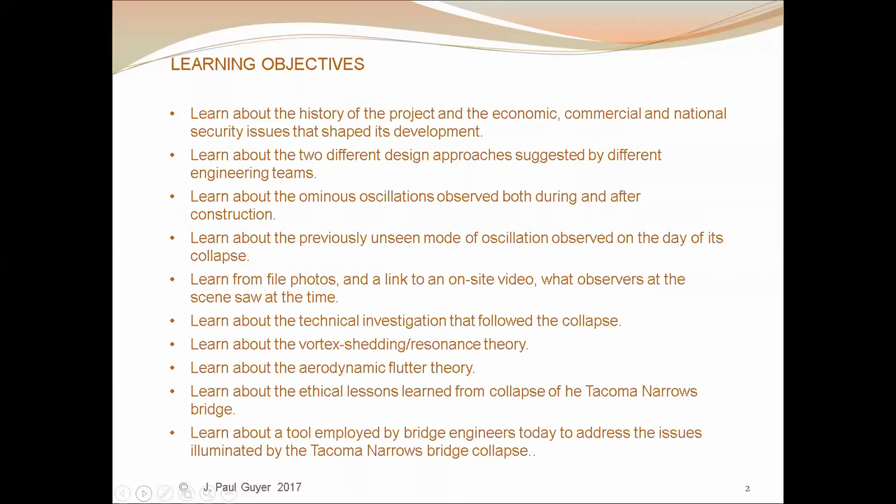Learning objectives, all very interesting. Here's kind of what I'll be talking about, the way I'll be slicing up the information today, the discussion today.

I'll talk about the history of the project, how it came into being, and that's important because what happened historically really caused the ethical failure that we'll be focusing on today.

These ethical issues webinars, by the way, there's certainly room for differences of opinion, and there can be those who would have a different opinion of this incident than mine. What you'll obviously be hearing about today is my view of what happened and what the ethical issues were.

But if others have a different view, that's fine. I'll be talking a bit about the history of the project. The design proposals for the bridge—there were different ones proposed, and then there is the actual design that was implemented.

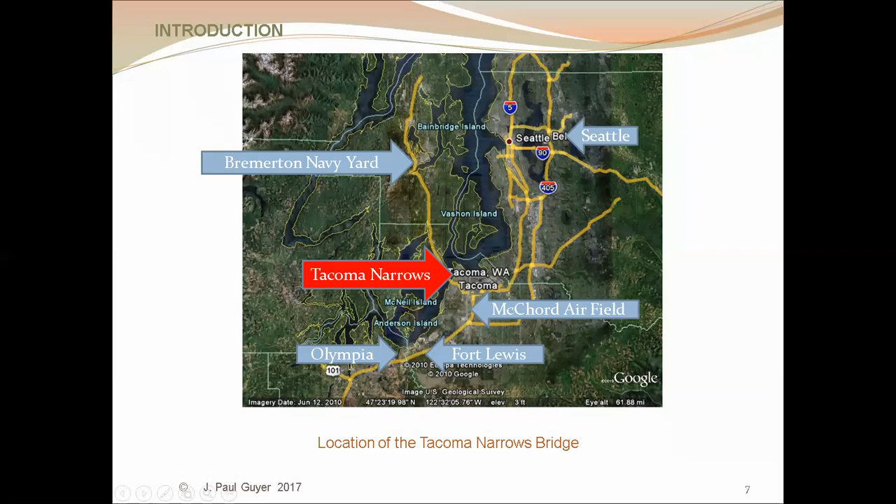So this is what we're talking about, and the bridge we were talking about is there at Tacoma. The Tacoma Narrows is the body of water that the bridge was crossing.

Just to give you a feel for driving distances up in this area back at that point in time, late 1930s, early 1940s: from the city of Tacoma to a place called Gig Harbor, somewhere on the Olympic Peninsula, before a bridge was built at the Tacoma Narrows, that was a 107-mile drive. If you could get a bridge built across the Tacoma Narrows, it would only be 8 miles, and driving time would be reduced from 2 hours and 10 minutes to 17 minutes.

Now, in civilian terms, you might say, well, a couple hours, that's no big deal. You can get stuck in a traffic jam in LA for 2 hours. So from a civilian perspective, some of these time differences don't sound that important, but from a defense standpoint, they are. They're very important.

And this was very much illustrated as an example as a result of the Japanese attack on Pearl Harbor and how quickly it took place, and that the U.S. did not have time to mount any sort of defense at Pearl Harbor, and great harm was done to the Pacific Fleet as a result. It happened that a number of the major capital ships of the U.S. Navy were at sea when the Japanese attacked, so they avoided damage. But we all know about the damage and the harm that was done at Pearl Harbor.

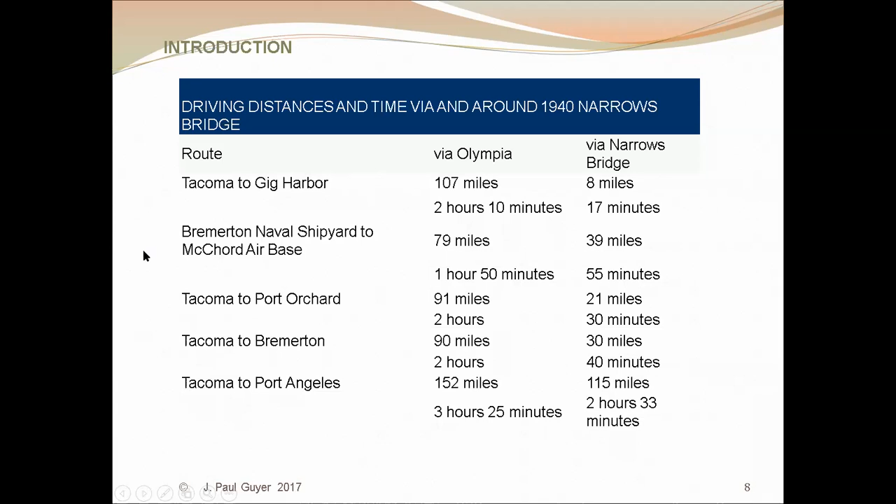And again, that doesn't sound like a lot in civilian terms, but from a military perspective, it was very important. Some other distances: Tacoma to a place called Port Orchard on the Olympic Peninsula, 91 miles, reduced to 21 miles if you could get a bridge at the Tacoma Narrows. Tacoma to Bremerton, very important, 90 miles, could be reduced to 30 miles, driving time reduced from 2 hours to 40 minutes. So important savings in driving time and the ability to move military from Fort Lewis and aircraft from the air base McChord to the defense of Bremerton.

Here is an aerial photo today, and the body of water is, of course, the Tacoma Narrows. That's the city of Tacoma on the right, and the bridge that you see across the Tacoma Narrows is the bridge that is there today.

On the left-hand side there, I haven't had a chance to verify this, but let's see now. I've got a phone call here, and I need to get rid of that. Okay.

That thing you see on the left there, to my eye, looks an awful lot like a World War II era airfield. And so again, back at that time, the 1930s, there was no bridge, so it would be a long drive winding around to get to that airstrip, if that's in fact what it is.

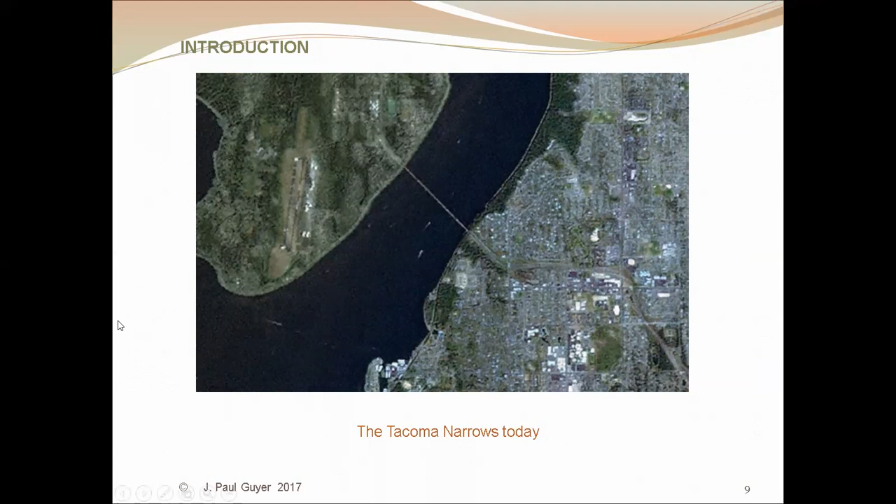So here we are in the 20th century, and no bridge across the Tacoma Narrows. Let's see, I want to check something here. I'm checking my controls. Stick with me.

So here we are in the 20th century, and actually back in the 19th century, in the 1800s, is when interest began to perk up in the Pacific Northwest about the issue of a potential bridge at the Tacoma Narrows. Back in the 1890s, early part of the 20th century, logging, a very important industry in the Pacific Northwest, with a lot of timber, very heavily forested. The sawmills, the market for timber, was south of the Tacoma Narrows in Washington State, and the logging industry.

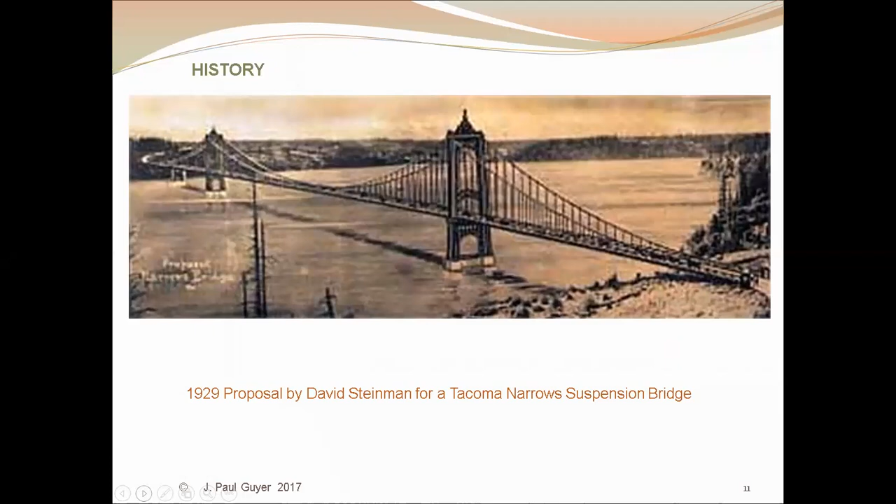Here was one of them - it was for a suspension bridge. Again, just in the talking stages. Since it would be a high-level suspension bridge, it would not obstruct the navigable waterway.

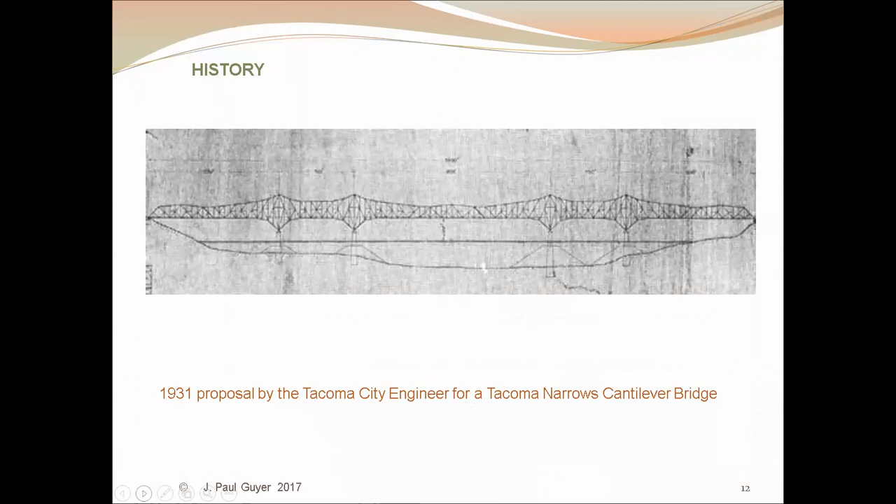Here is a cantilever bridge that was sketched up by the Tacoma city engineer, high enough to satisfy the navigable needs.

But there's still the issue of funding - who's going to pay for it? The city of Tacoma certainly wasn't going to pay for it. The business and commercial interests in the Tacoma-Olympia area didn't have the money to pay for it. The state of Washington didn't have the money to pay for it either.

One idea that began to perk up was for a toll bridge - in other words, float bonds and then pay them off with tolls paid by automobiles and trucks that use the bridge. The problem there was that the traffic projected to be crossing the bridge at the Tacoma Narrows was quite small, and a toll bridge just wasn't going to generate enough revenue to pay for the bridge.

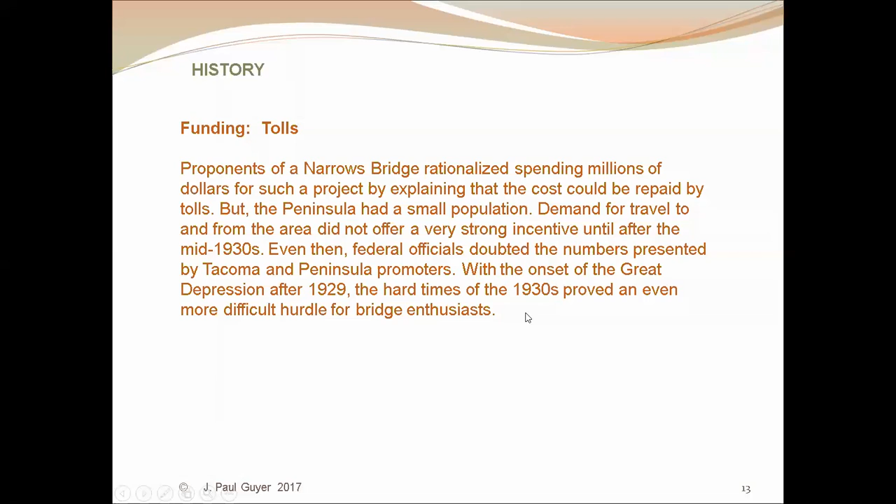So there was a desire for a bridge, but no money. In addition, since they couldn't see a way to get a bridge built across the Tacoma Narrows, the state of Washington said, well, let's at least start a ferry service across the Tacoma Narrows.

So the state of Washington let out a contract, a concession for a ferry operator, so at least people could drive down to the water, get on a ferry, and take it across to the Olympic Peninsula. But that had limited capacity, and it was a very slow way to get across.

The concession contract was let to a private company called the Washington Navigation Company in 1926. This concession agreement had a no-competition clause in it, which seems logical, because nobody would incur the cost of running a ferry across the Tacoma Narrows if another ferry service might be started to compete.

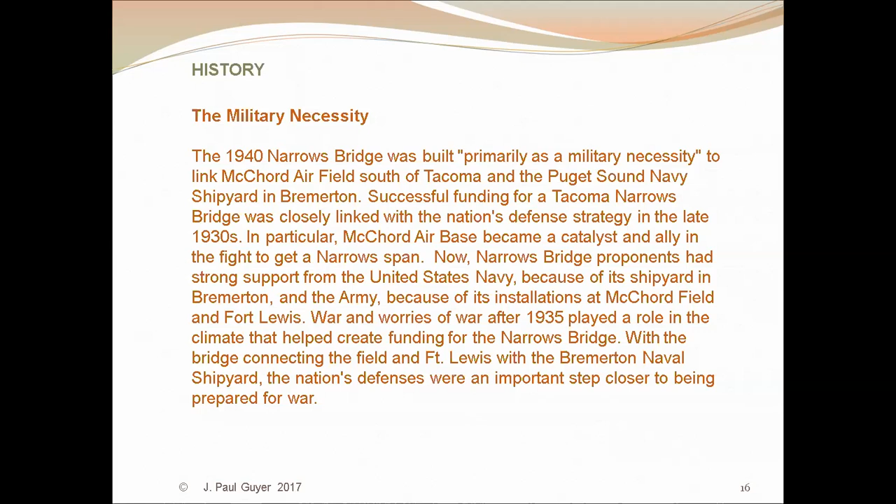And the entity being looked at to provide this funding, of course, was the federal government. So the state of Washington's Department of Highways undertook to put together a proposal to the federal government for funding for a Tacoma Narrows Bridge. This effort was under the direction of an engineer named Clark Eldridge.

He and his engineering staff employed at the Washington Department of Highways prepared plans for a suspension bridge that was of conventional design. Now, the key feature of the bridge that is important here is the roadway support girders.

The conventional design practice back at that time, and even continuing today, is to have the roadway support girders be truss girders, open truss girders, and very deep truss girders, because as you'll recall, when you make the cross section of a girder or a beam deeper, it's stronger. So a 25-foot deep truss girder reflected the state of the art in bridge design for suspension bridges at that point in time.

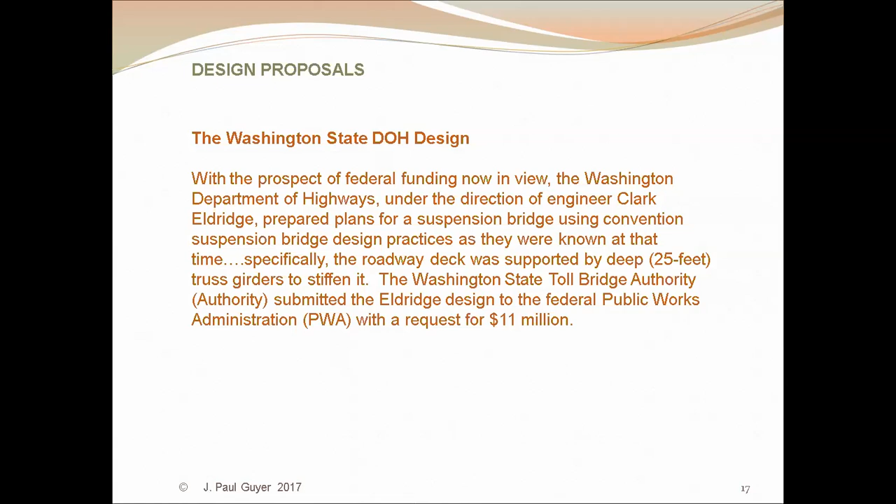A point of interest, not relevant at all to what we're talking about here today, but back at that point in time, the director of the Washington State Highway Department was a gentleman named Lacey Murrow. And Lacey Murrow was the brother of the very well-known Edward R. Murrow, radio and later television newscaster for networks. Just an interesting sidelight there.

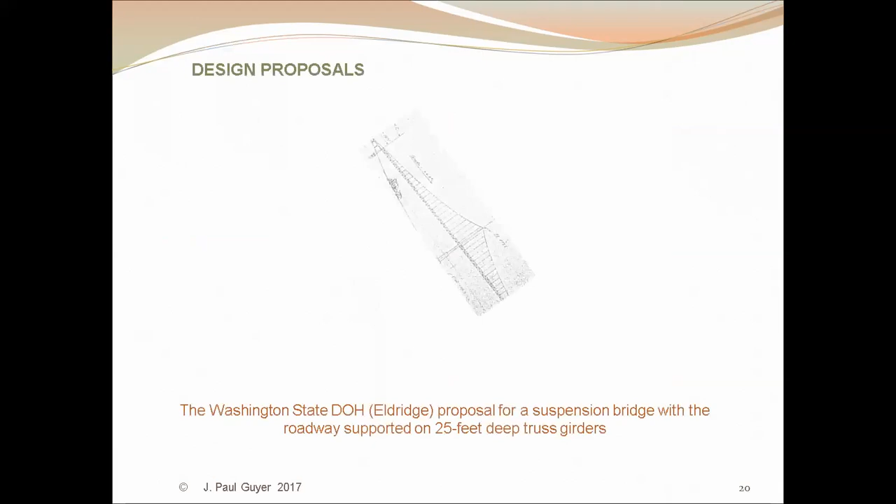So here is the design that Clark Eldridge and the Washington State Department of Highways came up with: a suspension bridge, high level, so it's not obstructing the navigable waterway. And the key feature is that it had 25-foot deep open truss girders supporting the roadway. This was then, and continues to a large degree today to be, the standard operating procedure. Well-known and significant bridges had been built with this type of roadway support girder successfully. So a conservative, conventional design.

Now, let's see, I'm checking my clock here.

As happens practically almost every time you have a large public works project or undertaking in the mill, there develops a competition between in-house government agency engineers and private engineering firms. The in-house government engineers with the Washington Department of Highways wanted to design the project. That's just the way engineers are. And private engineering firms wanted to get the contract to design the bridge, and that, of course, is an economic concern for the private engineering firms.

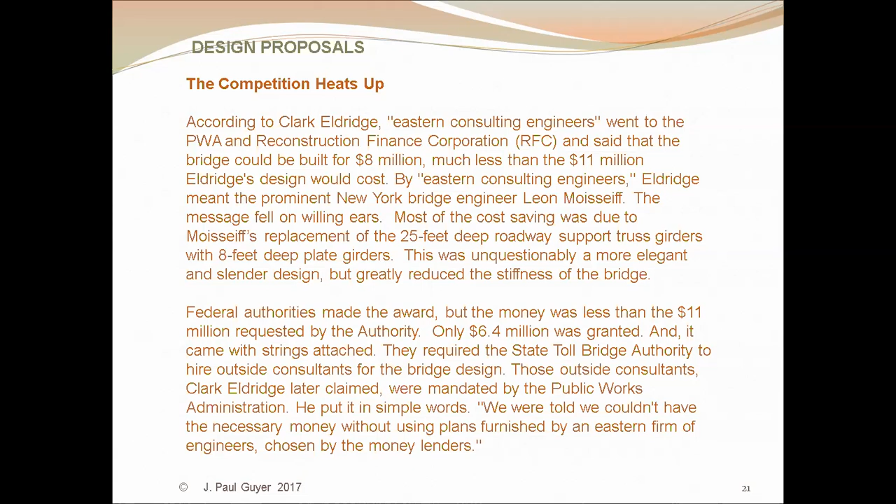The federal government said to the state of Washington, we'll give you the money for the bridge, but only if you farm out the design of the bridge to these private engineers on the East Coast. The Washington state engineers were livid. Clark Eldridge and his engineers protested. They said that Moisseiff's plan was fundamentally unsound.

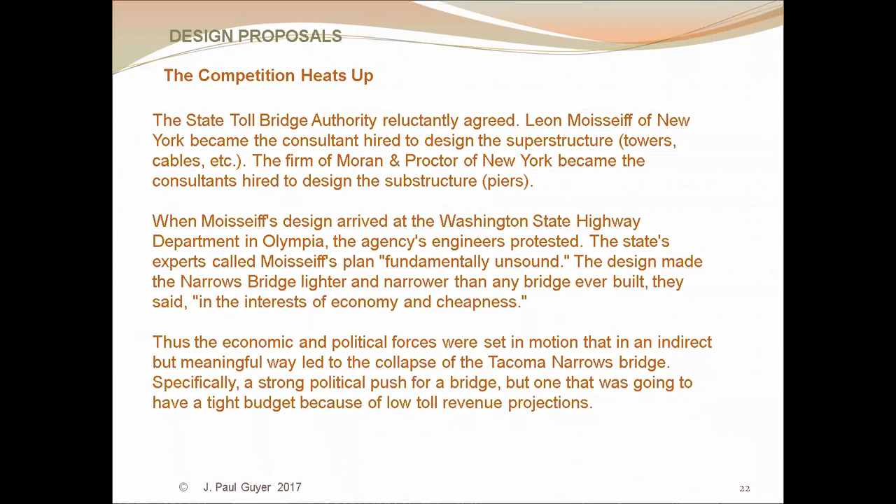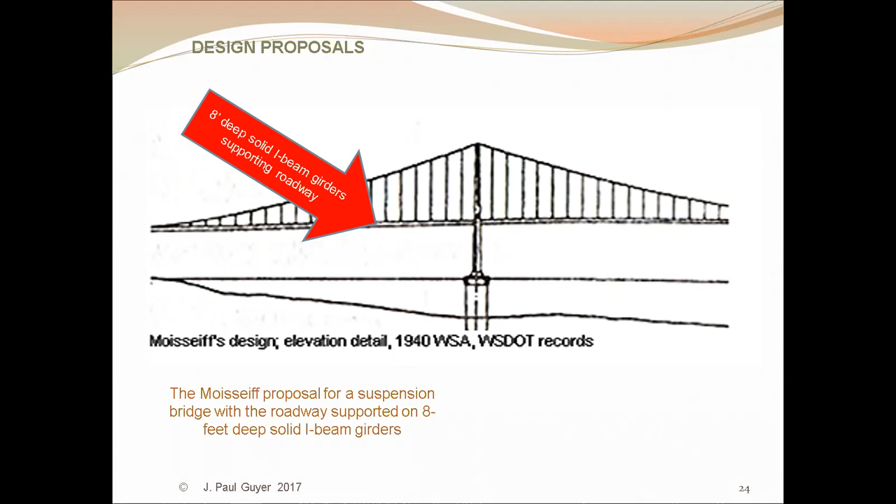Here's a picture of Mr. Moisseiff's design. You see the shallow I-beam girders, only 8 feet deep, as compared to the 25-foot deep girders in the Clark Eldridge design. The solid I-beam girders are solid, so the horizontal winds do not pass through the girders, but impact the girders.

There's a chart I'm looking for. Another factor that came into play here is the fact that the roadway was narrow. It was only a 2-lane highway across the proposed bridge because the amount of traffic was projected to be light. And when you reduce the roadway width, that makes the girders even less stable. So that was another consideration. Now here's a table that I think illustrates what we're talking about pretty well.

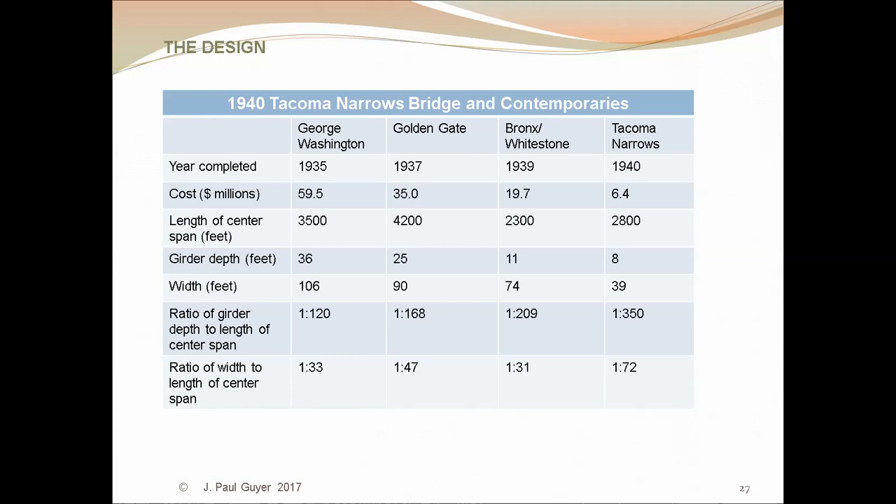And then you see the Tacoma Narrows: the girder depth was only 8 feet, less than a fourth of that at the George Washington. The girder was a solid I-beam configuration, not a truss configuration, so the wind did not blow through the Tacoma Narrows girders. The width of the roadway was only 39 feet. The ratio of the girder depth to the length of the center span at Tacoma Narrows was 1 to 350, compared to George Washington's 1 to 120, Golden Gate's 1 to 168. And the ratio of the width of the roadway to the length of the center span was 1 to 72, compared to 1 to 33 at George Washington and 1 to 31 at Bronx Whitestone.

That, though, is the design that the federal government said they would fund, and the state of Washington Department of Highways reluctantly acquiesced because that was the only way they were going to get the money for the bridge.

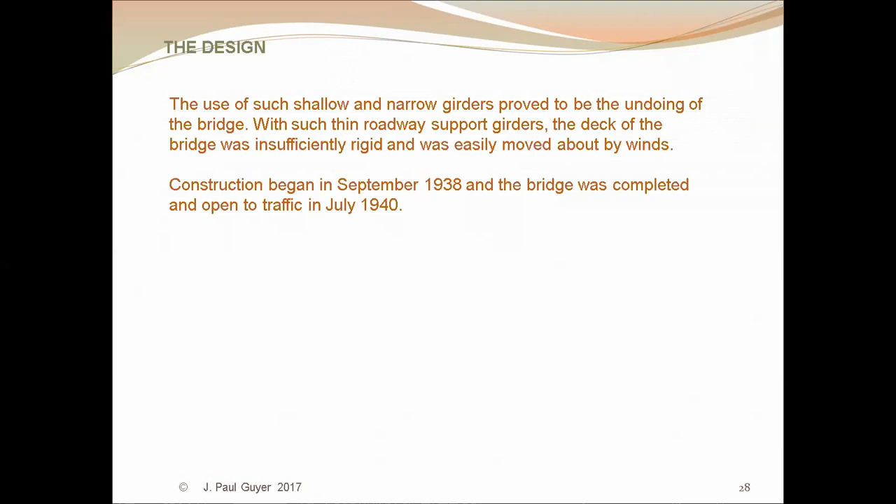Construction of the bridge began in September of 1938. The bridge was completed and open to traffic in July of 1940. Here are some pictures of the bridge under construction.

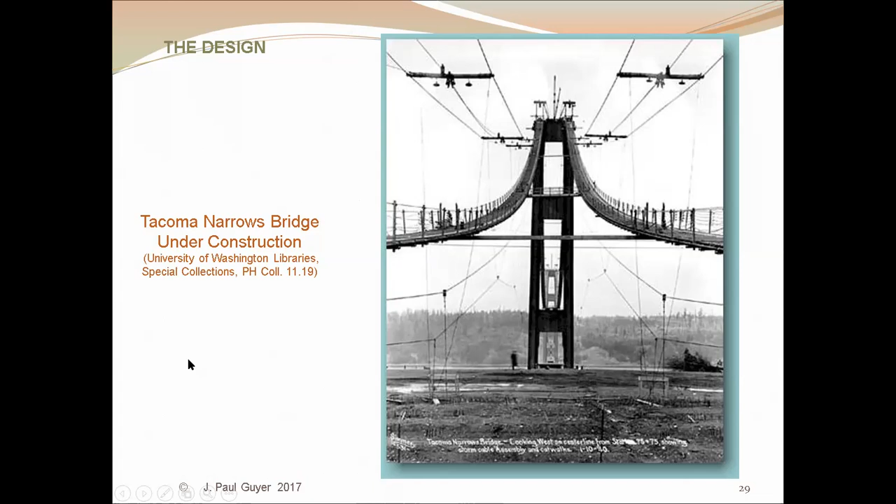The bridge begins to take shape, and you can see that it's a very elegant bridge that is being built. Here's the bridge completed. Again, very elegant, light, and very beautiful. Another picture, and you see the roadway support girders, solid I-beams.

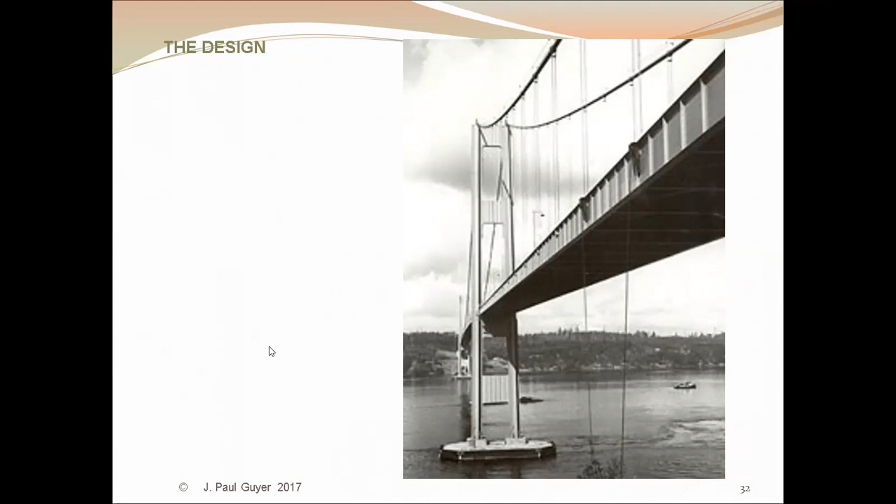As a result of being solid webs, they seriously impeded the flow of the horizontal winds through the Tacoma Narrows. Winds are a significant consideration at the Tacoma Narrows.

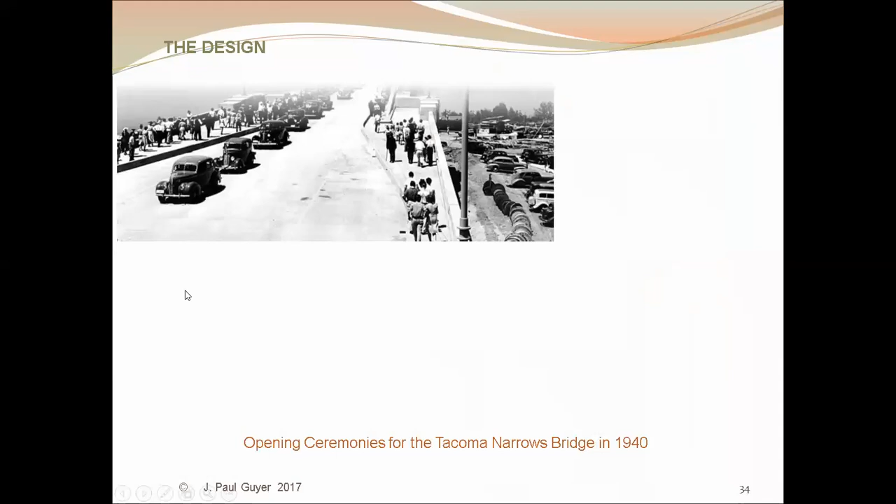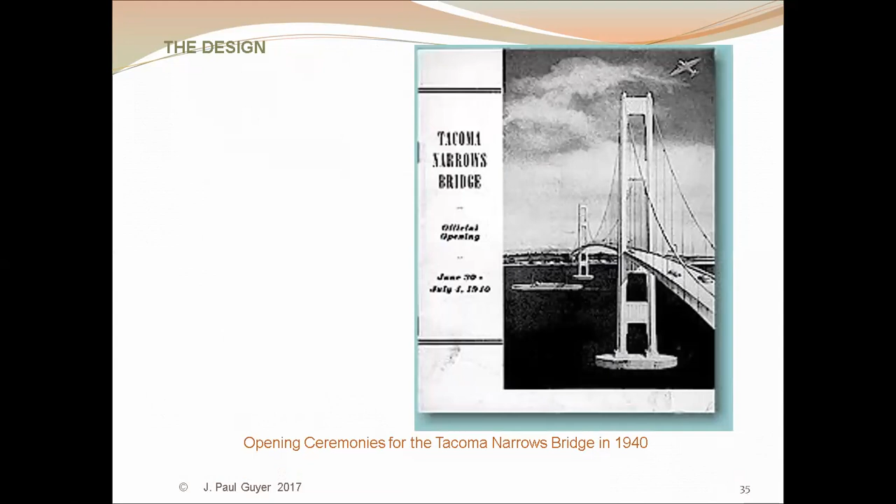Even before the bridge was completed, the people working on the bridge began to experience serious oscillations. The bridge became, even while still under construction, known as Galloping Gertie because of the up and down transverse oscillations that were being experienced during construction.

The bridge opened on July 1st of 1940. It became something of a tourist attraction. People from Seattle on a Sunday afternoon would go out for a drive in their cars and specifically drive across the Tacoma Narrows Bridge and experience the kind of wild ride that was there as a result of these oscillations. And the bridge managers, the state of Washington, had a problem with this bridge.

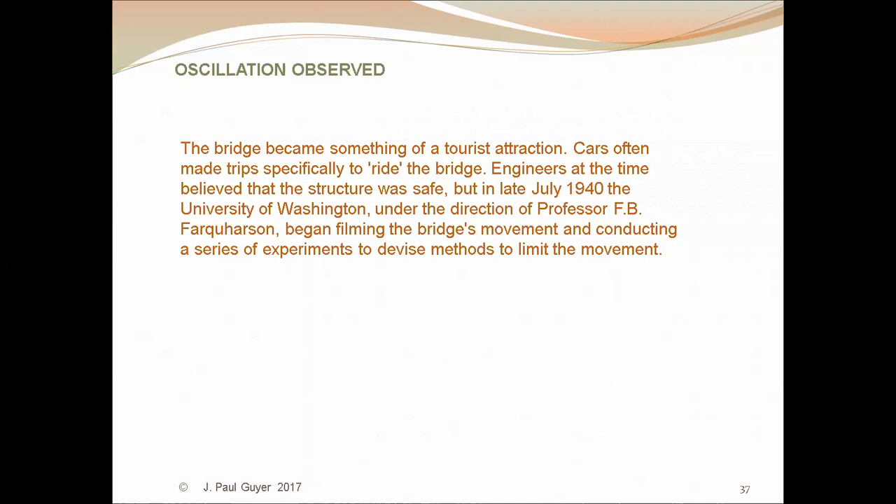They retained the services of a Professor Farquharson at the University of Washington to review the design, to investigate, and to develop mitigation measures that could control or eliminate the oscillations. Here is the state of the technology that Professor Farquharson had available to him.

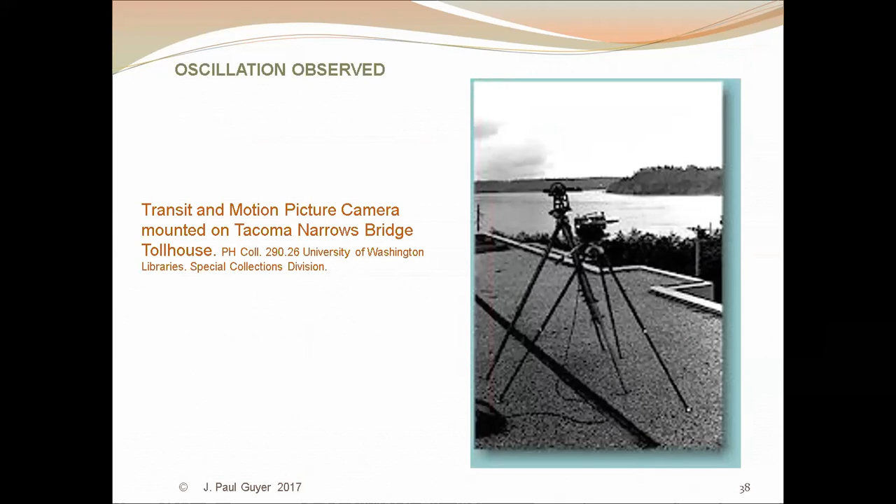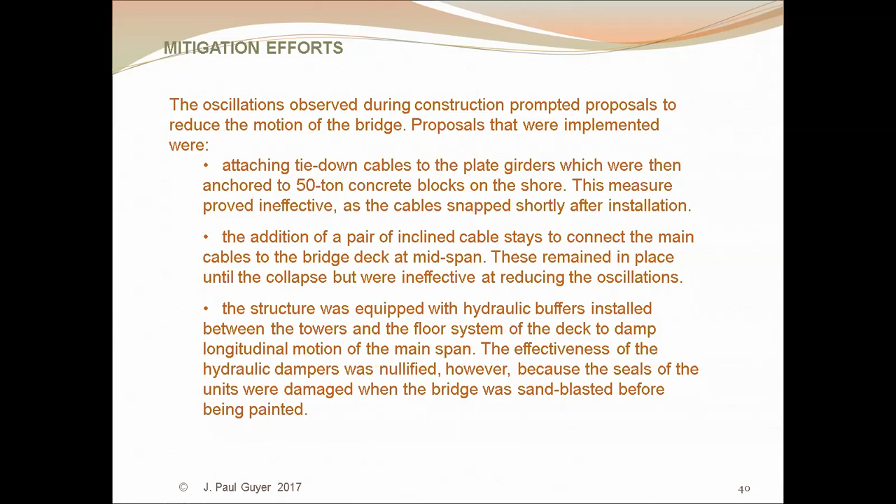Some Band-Aid type mitigation measures were attempted and did get in place before the bridge collapsed. Tie-down cables were put in place. Hydraulic buffers were installed between the towers and the floor system of the deck to damp the oscillations, but neither was effective.

One of the more bizarre proposals was to drill holes in the solid girders so that the air would pass through them and not act as aggressively on the girders. This idea needs to be cooked a little more, because obviously if you're drilling big holes in the flanges and the web, you're going to weaken the girder. So that was not a real swift idea.

Another idea that was identified was to provide some streamlining around the girders, and that had some value.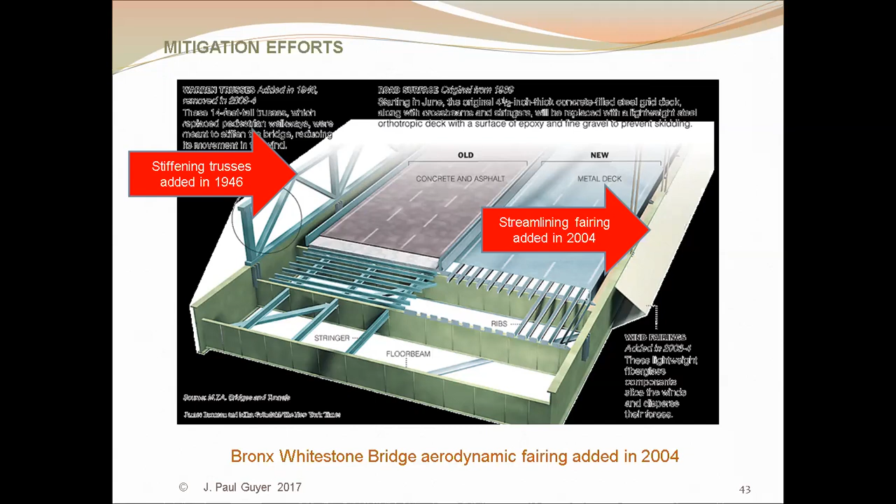This incident, the collapse, took place in 1940. You might be thinking, well, geez, why did it take them until 1946 to get any remedial measures in place? Well, the reason is that during World War II there was a great shortage on the availability of steel, and the materials were not available for this type of project. All of the country's steelmaking capacity was devoted to the war effort.

So bridge opens in July of 1940. On November 7th, the wind was blowing through the Narrows at a steady speed of about 42 miles an hour. Stiff wind, but steady. And that's important, and we'll see why.

At 10 a.m., the bridge began to oscillate severely in the torsional mode, and the bridge was closed to traffic. The bridge had been oscillating since it was under construction in the transverse mode, up and down. And on this day, it began to oscillate in the torsional mode, clockwise, counterclockwise, clockwise, counterclockwise.

Probably this was due to suspender cables finally breaking on one side, and that altered the support of the roadway asymmetrically, and the bridge began to oscillate in this torsional mode. At 10 a.m. on November 7th, the torsional oscillations are observed, the bridge is closed.

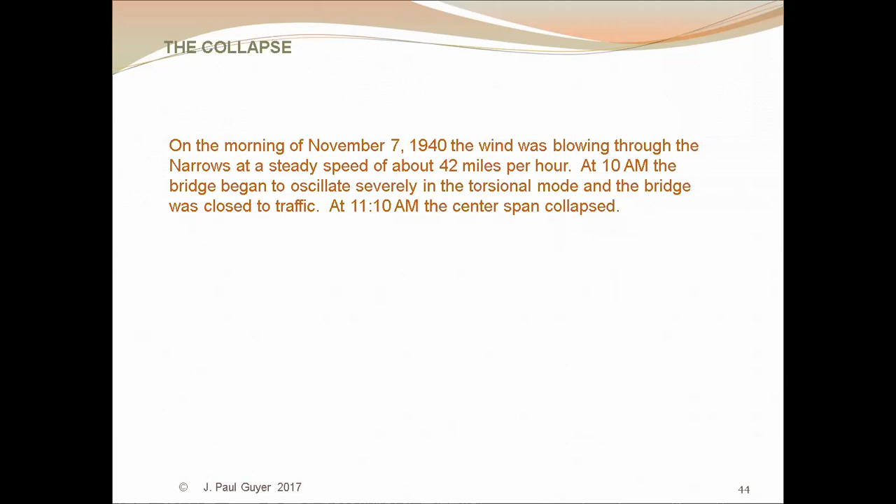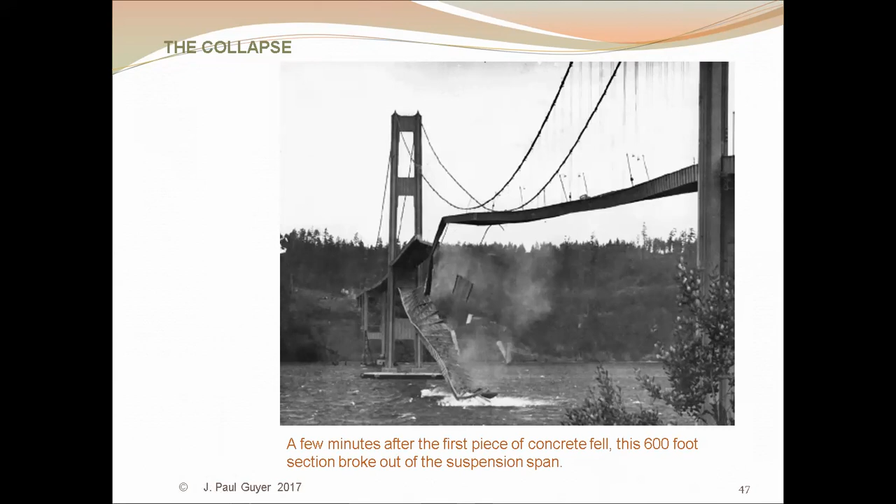And here is the actual collapse. Remember that everybody knew this bridge was going to collapse, and so there was an opportunity for people to film the collapse and to take still photos of the collapse. Here is another picture of the debris. Another picture.

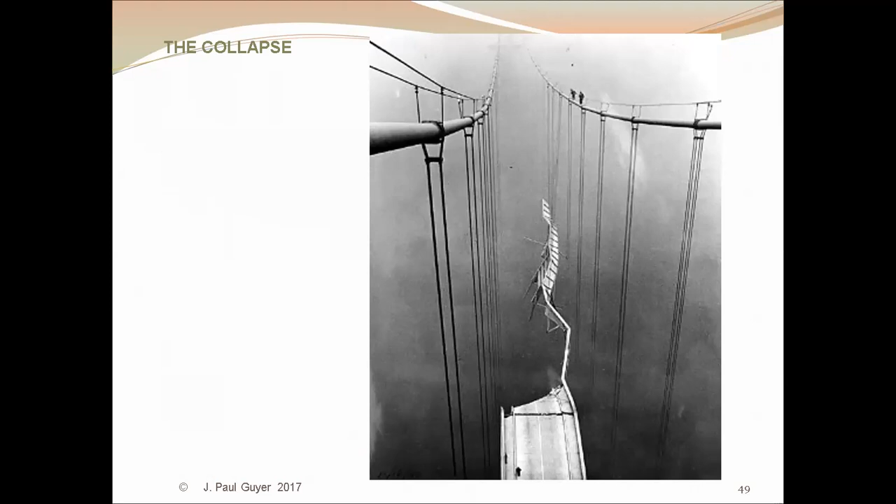Damage to the cables. And there was some twisting and buckling of the towers.

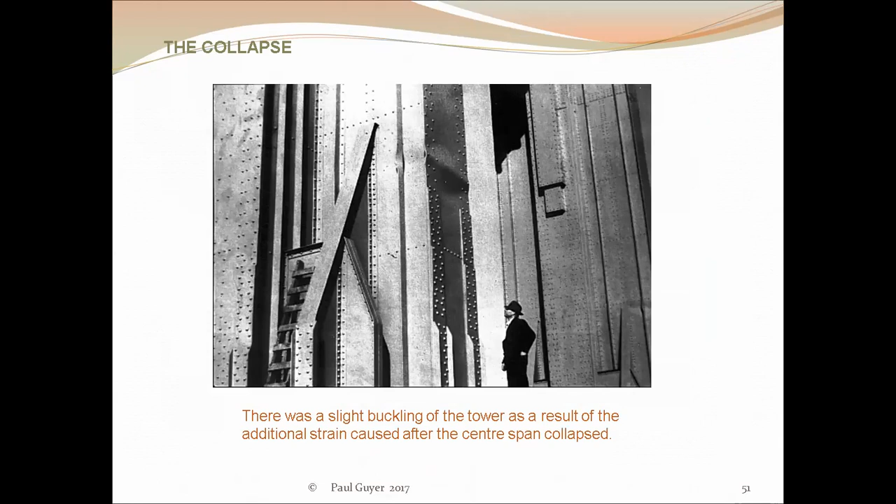Now, as I indicated, there are some videos. These were taken from 8mm movies that were filmed, and they're available on YouTube, so you can review these at your leisure. Now though, we're going to see one of them here, about a 5-minute video.

So the incident takes place, and there of course is an undertaking to investigate the collapse and try to determine what the cause of it was. It was under the direction of an entity called the Federal Works Agency.

It looked at random fluctuations in velocity and direction of the wind, perhaps as a cause, fluctuating eddy currents, the von Karman effect could have been a factor, and then resonance or self-induced vibrations caused by wind fluctuation.

Now the resonance theory really didn't pan out very well, for the simple reason that the wind speed, although high, was constant. To have resonance as a consideration, you need a vibrating or alternating forcing frequency. The wind would have to be vibrating, if you will, fast, slow. And that was not the case.

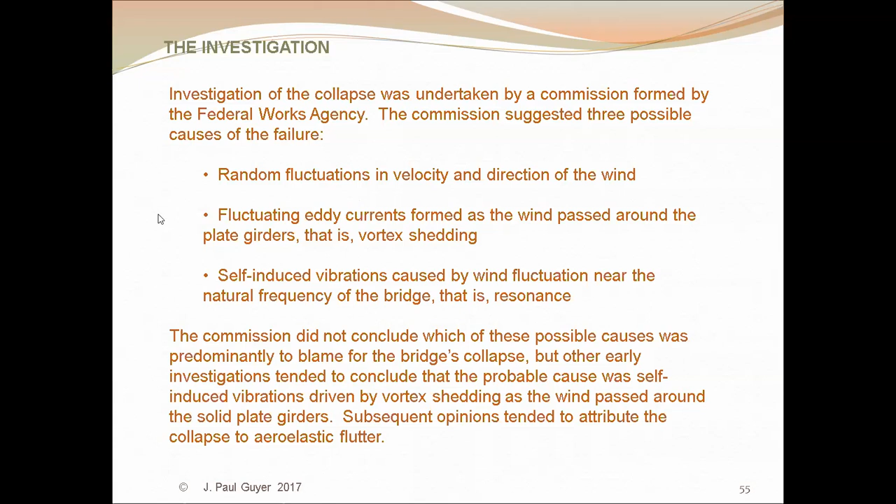So resonance was ultimately ruled out. The investigation focused on the fact that this was the first suspension bridge to use solid I-beams to support the roadway.

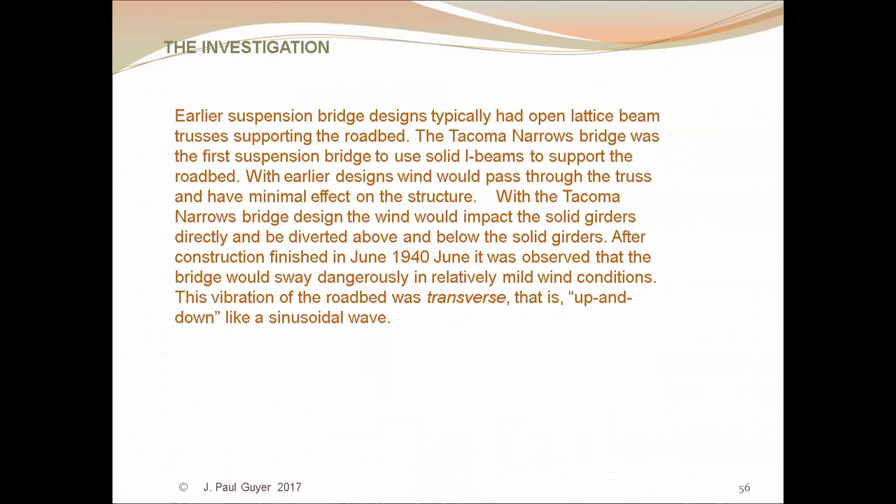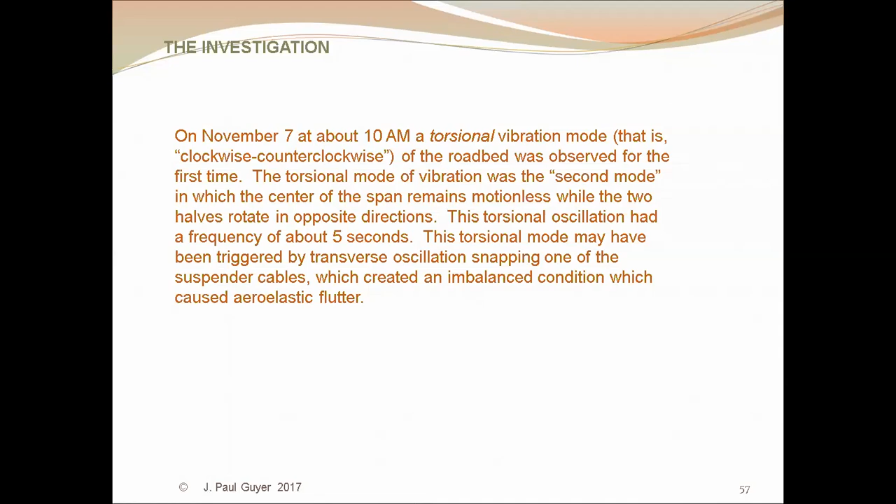And the torsional vibration mode, clockwise, counterclockwise - the speculation was, and it seems pretty reasonable, that all of the transverse vibration that had been going on for some period of time had resulted in one or more of the suspender cables breaking, which resulted in an asymmetric support for the roadway. And as a result, you got the torsional vibration mode.

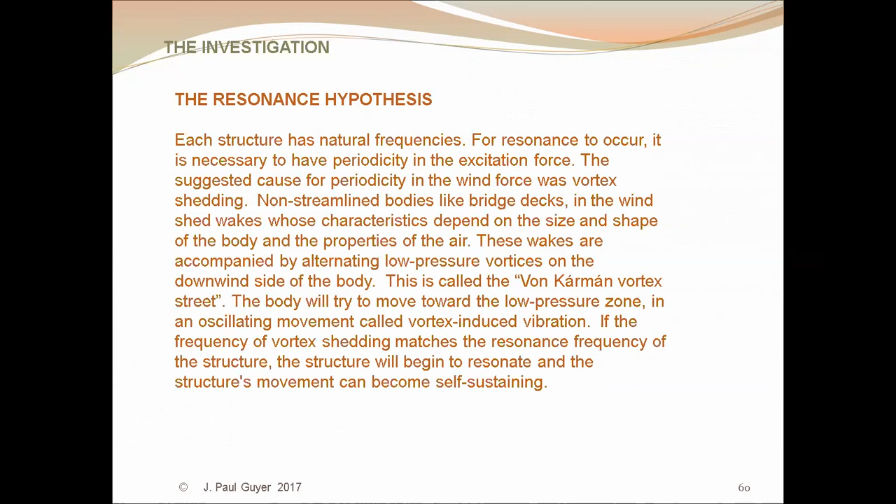The resonance hypothesis - there's a little bit of discussion on these slides about the resonance theory, and you're welcome to review it at your leisure. But like I say, it seems to be pretty well understood today that resonance was not the cause of the failure.

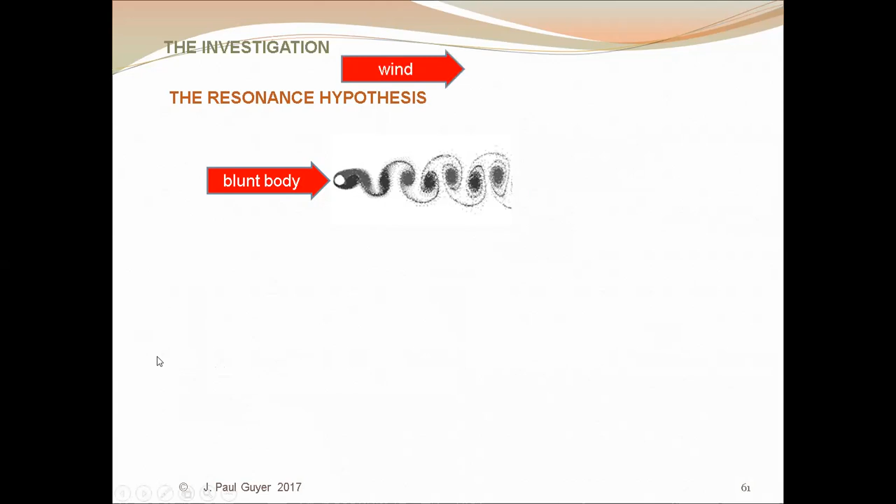The von Karman effect - Theodore von Karman, who was a very well-known aerodynamicist at Caltech, postulated and illustrated the von Karman effect.

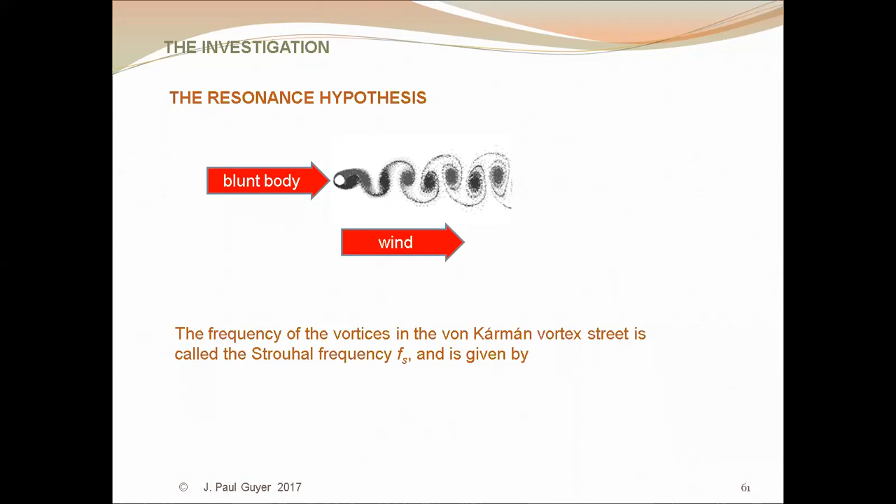In other words, when you put a blunt body in an airstream, the air tends to spin off of the backside in an alternating fashion. This was originally developed in the field of aircraft design - the airfoils in the airstream would spin off in an alternating fashion and cause vibrations. And the same thing occurs when you put a blunt body like a bridge girder in an airstream.

So flutter, aeroelastic flutter, probably was an important phenomena in what happened.

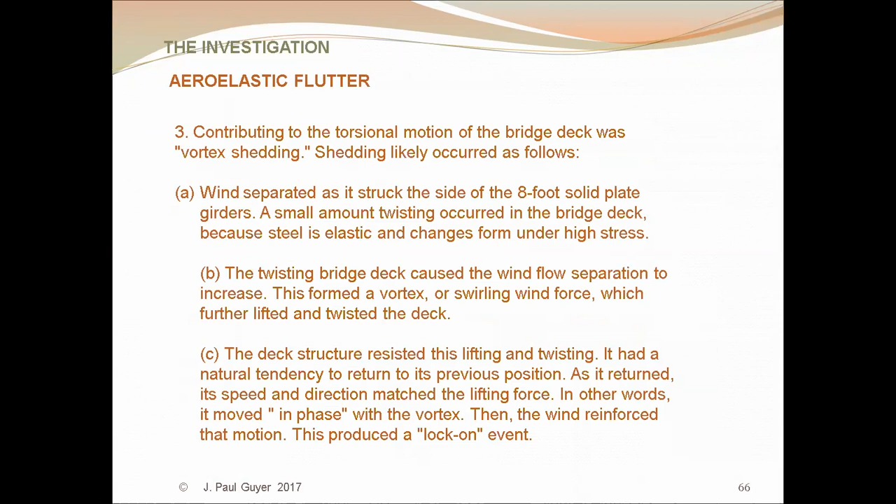The aeroelastic flutter - a way to visualize that is if you take a piece of paper, a strip about 1 inch wide by 11 inches long, hold it out at arm's length in front of you and drop it, and as it passes through the airstream falling to the floor, it flutters. That aeroelastic flutter was probably a consideration in the behavior of the bridge.

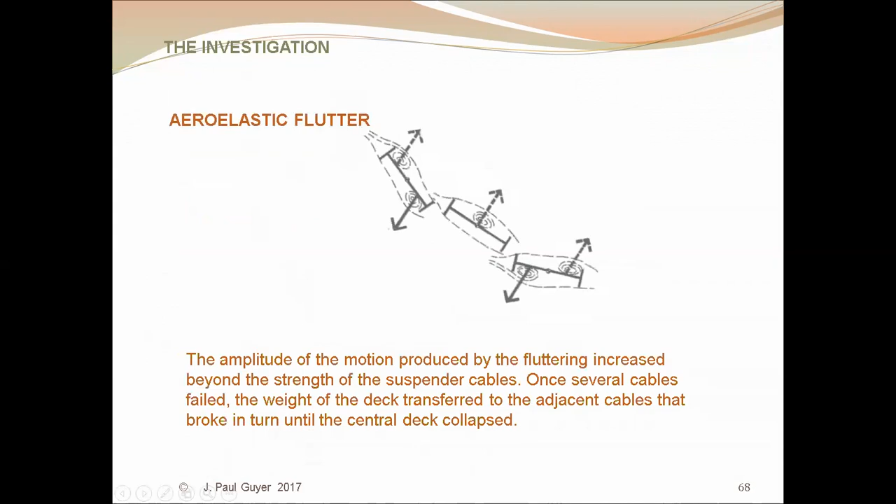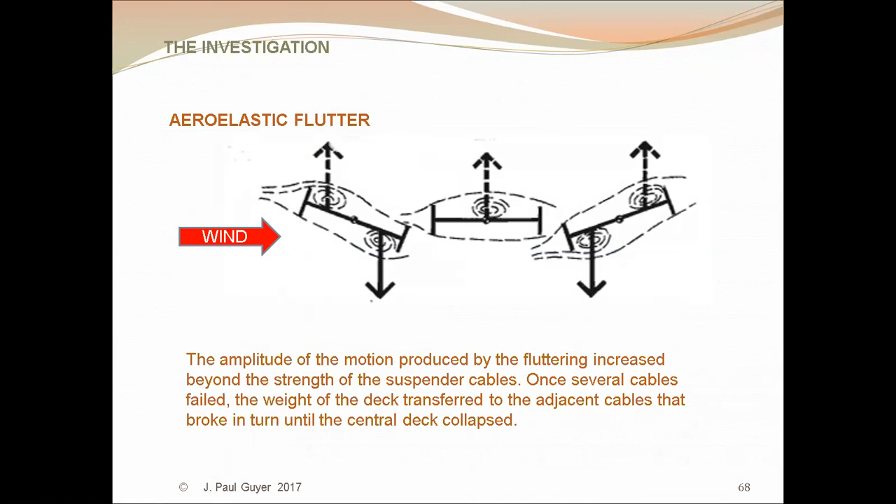So you had the bridge deck that was subjected to a horizontal wind, and alternately, without getting into a bunch of details, it causes the bridge deck to twist, and that was observed. So aeroelastic flutter is probably a pretty good candidate for the phenomena that was acting on the bridge.

Another very distinguished bridge engineer was on the review panel, Othmar Ammann, and he wrote that the Tacoma Narrows Bridge failure has given us invaluable information. It has shown that every new structure that projects into new fields of magnitude involves new problems for the solution of which neither theory nor practical experience furnish an adequate guide. It is then we must rely largely on judgment, and if, as a result, errors or failures occur, we must accept them as a price for human progress.

Now, I don't really quite go along with that - the business about just relying on our engineering judgment, and if it fails, that's just the price we pay. I don't go along with that, because I think there is a methodology for how to approach engineering challenges when you are stepping outside of the experiential envelope.

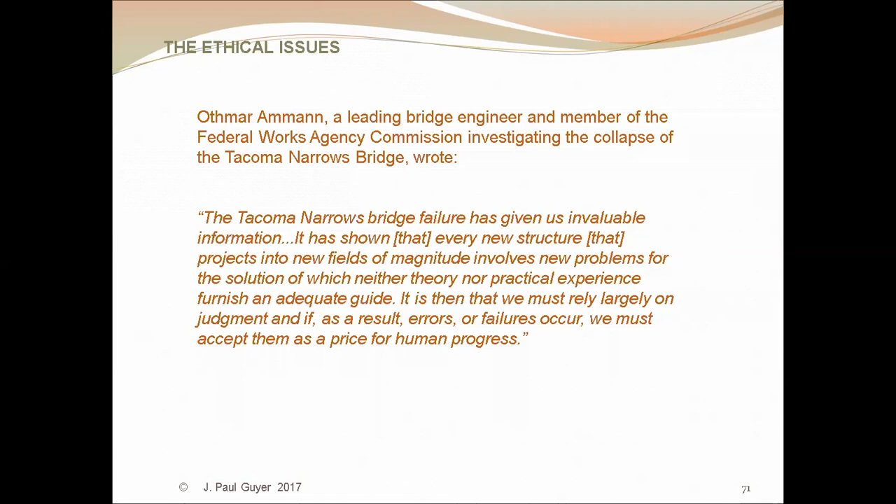There has never been a bridge with this configuration designed and built in the past, so we don't have any experience. I think there are ways, and I'll touch on these shortly. So, just to cavalierly say that if we step outside the experiential envelope and the bridge falls down, well, that's just the price we have to pay—I don't really go along with that.

It kind of, in a way, one of the ethical issues here is the concept of there being theoretical knowledge and experiential knowledge. Theoretical is the stuff you learned in engineering school—F equals ma, hydraulics, statics, strength of materials, and so on and so forth.

But the other kind of knowledge is experiential knowledge. How was this done in the past? Did it work? Can we benefit from that knowledge? And what happens if, because of the engineering challenge, we need to step outside the experiential envelope—in other words, design a bridge where the longest suspension span was 3,000 feet, and we need to go to 3,100, 3,200, 3,300 feet? Well, essentially, I think there are a couple of major approaches.

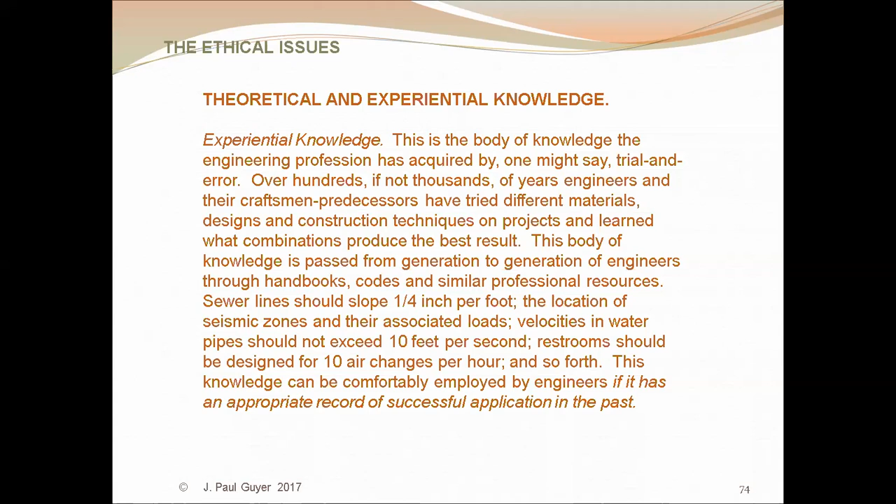Now, hang on just a sec. Okay, and then the other ethical issue, in my view, is the economic pressures one—the pushing and shoving between government agency engineers and private engineering firms to get the design work, the design contract. I think the issue is simply that you do not compete for engineering work by going to the owner, whoever is controlling the purse strings, and saying, oh yes, we private engineers can design this bridge faster, cheaper, better, et cetera, because you cannot.

Now, in this case, the reason Moisseiff's team could not make that kind of statement is that the theory developed by this Austrian gentleman was unproven—there was no experience with it. And there are similar problems with engineers if they try to compete for engineering work by saying to the owner, we can do it faster, cheaper, better, etc.

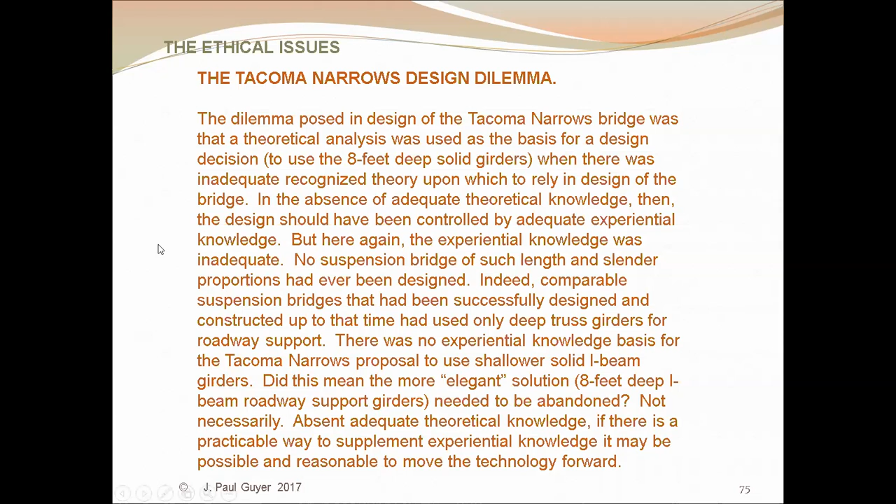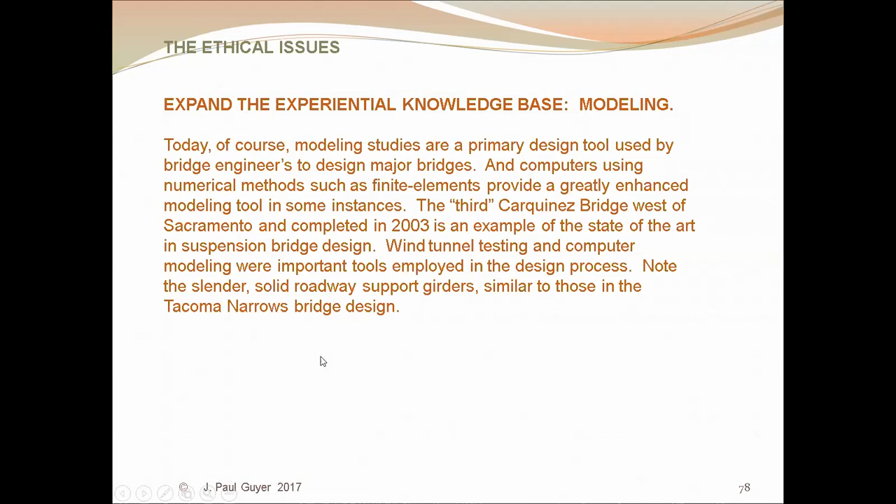But wind tunnel testing now is very common with major bridge structures, as well as computer modeling.

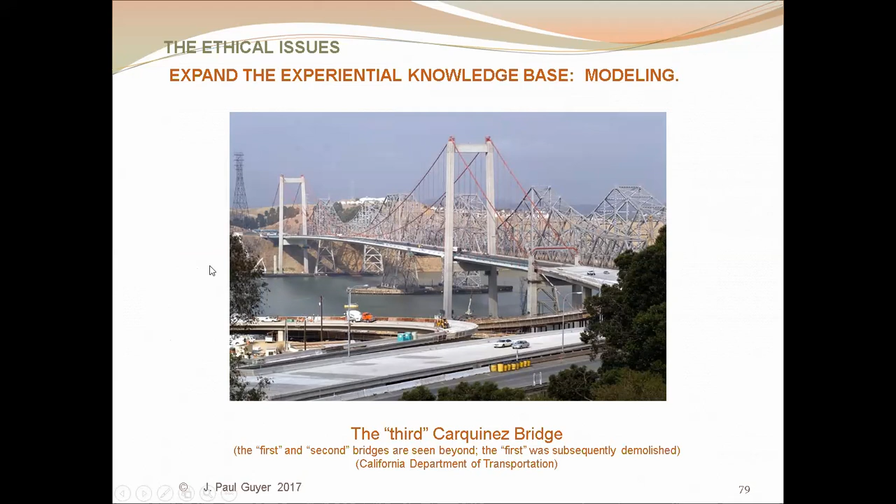So here, as an example, is a bridge that's near me in Northern California. There are actually three bridges here, and the latest one is the suspension bridge you see there, and it was wind tunnel tested. It does have solid I-beam support girders for the roadway, but they were wind tunnel tested.

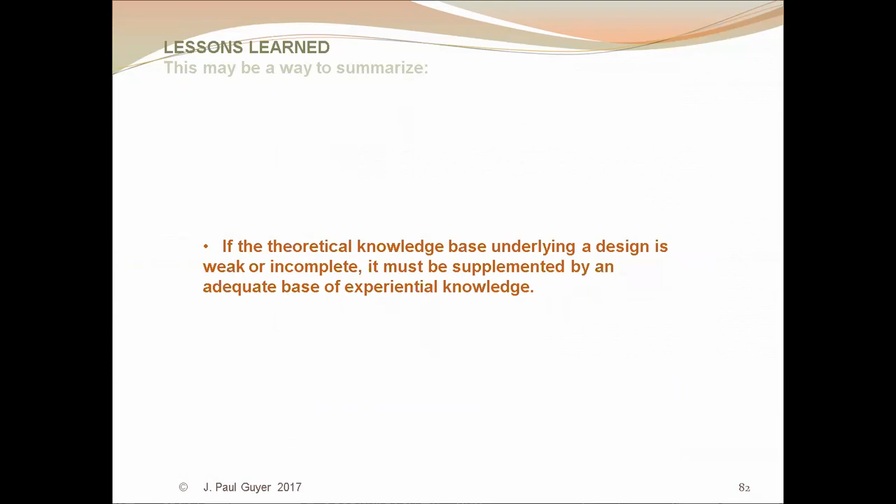So this is how I would summarize the ethical issues. If the theoretical knowledge base underlying a design is weak or incomplete, it must be supplemented by an adequate base of experiential knowledge—has one of these things been built before, and did it stand up? If the experiential knowledge base is weak or incomplete, it must be expanded until it is adequate, and a principal way of practicably doing this is through appropriate modeling.

And the second major ethical issue, in my view, that arises here is: don't compete for engineering contracts by telling an owner you can do it faster, cheaper, better—because you do not control all of the actors in a major engineering project.

So that gets us kind of to the end of the story. Clark Eldridge and the Washington State engineers did not take this lightly. They're quoted in the record: U.S. moneylenders blamed by engineers for span crash. The men who held the purse strings were the whip crackers on the entire project. We had a tried and true conventional bridge design. We were told we couldn't have the necessary money without using plans furnished by an Eastern firm of engineers chosen by the moneylenders.

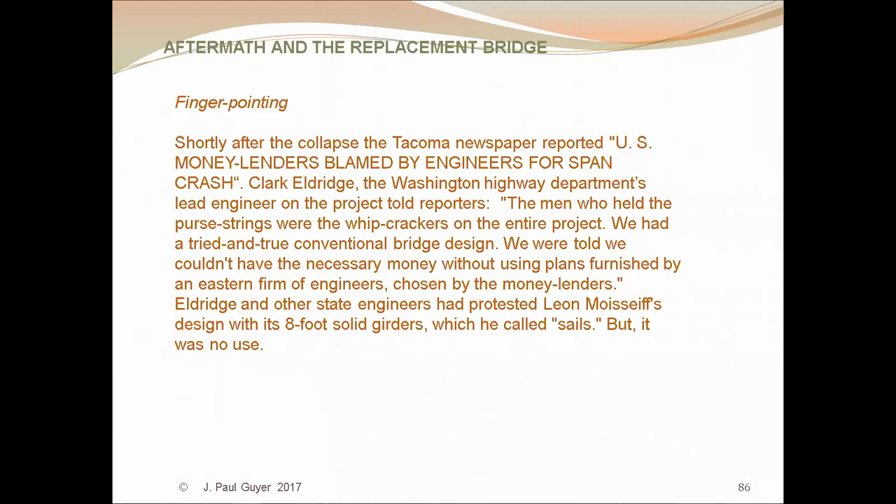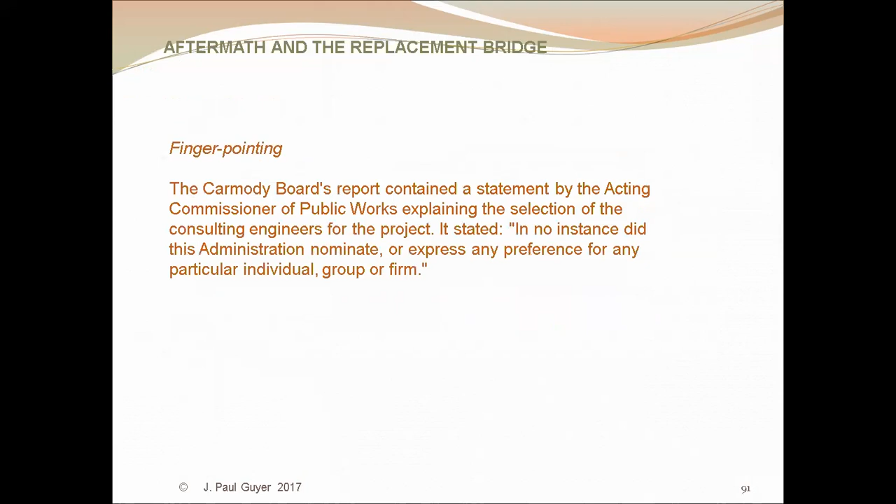A kind of interesting post-mortem point is that the state of Washington had a number of insurance policies that it had taken out on the bridge, with a number of different insurance companies and insurance agents. One of the insurance agents on one of these policies embezzled the money that the state of Washington had paid and did not pass it on to the insurance company. So the state of Washington took it in the shorts as far as that particular insurance policy was concerned.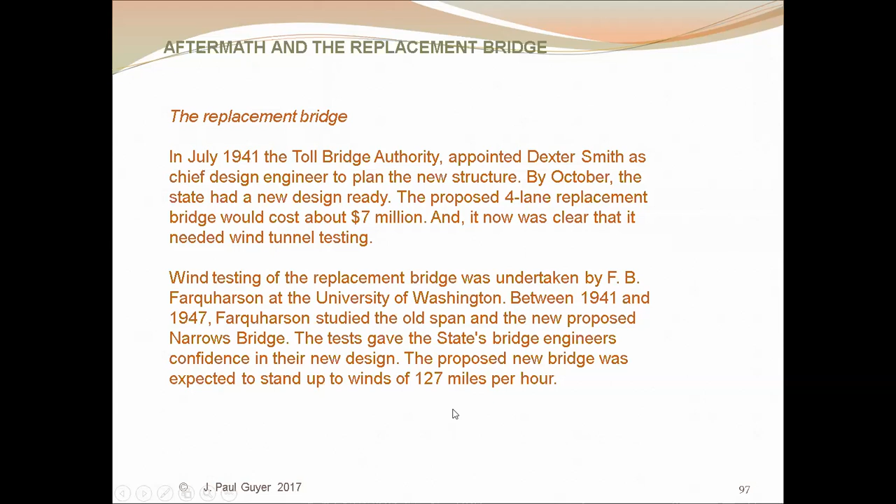But most of the cost of the damage was borne by the insurance companies, which is frequently the way it works. And a replacement bridge has been constructed—this is it. It didn't open until 1950, again due to delays caused by shortages of steel during World War II.

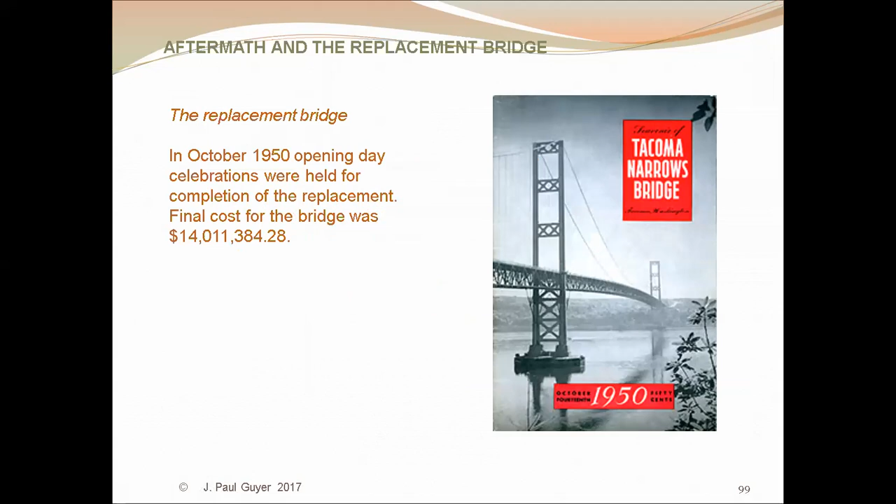This replacement bridge, you see, has the conventional deep truss type girders supporting the roadway. And another view of the bridge today—you also see that it's a 4-lane roadway, so that provides additional stiffness for the bridge.

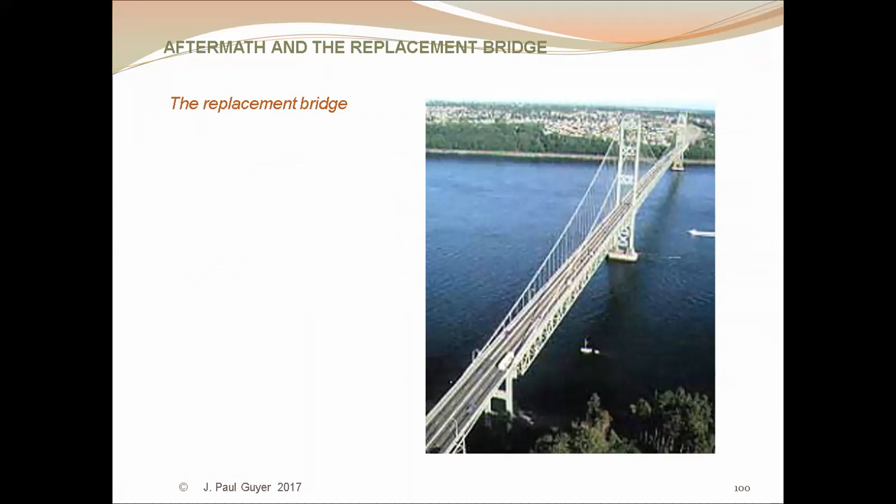And that gets us to the end of the presentation today. I hope that you've found this to be a little bit interesting, and that it gives you something to think about, and in particular may influence the way you approach projects that come across your desk in the future.